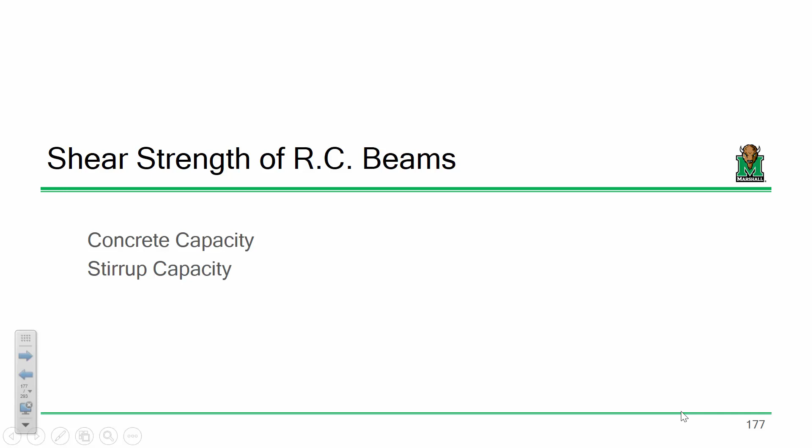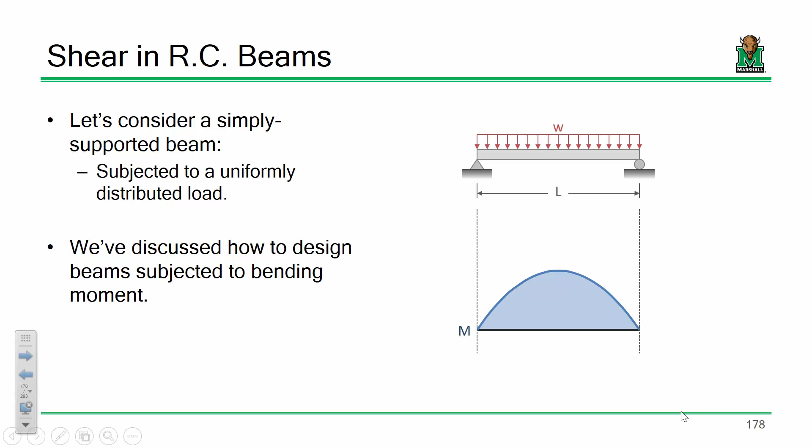And that's in shear. Now, we went over behavior last time. We talked about here's what a bending moment diagram looks like for the types of beams we've been designing so far. But here's the shear diagram.

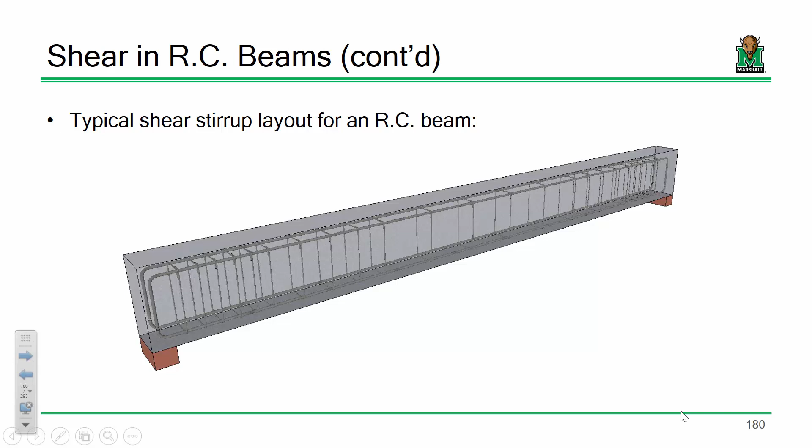So what we need to do is design and detail reinforcement according to shear. Now, what we're ultimately going to get is a reinforcement pattern that looks something like this. We're basically placing those hoop stirrups along the span, and we're going to have more of them bunched up near the supports, less of them near the midspan, but this is basically how we're going about things.

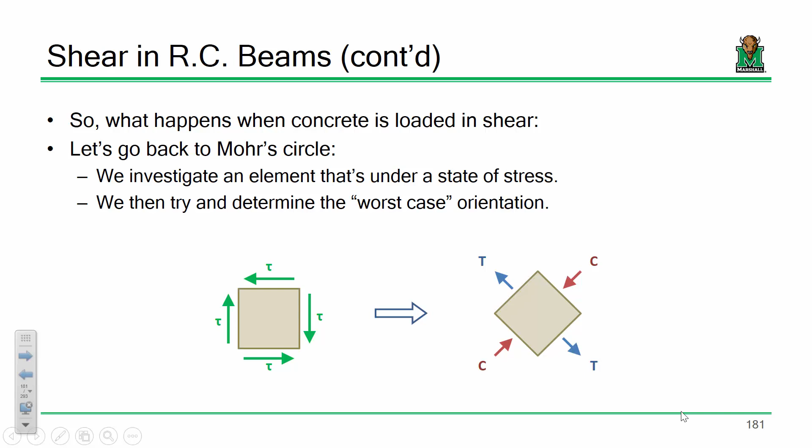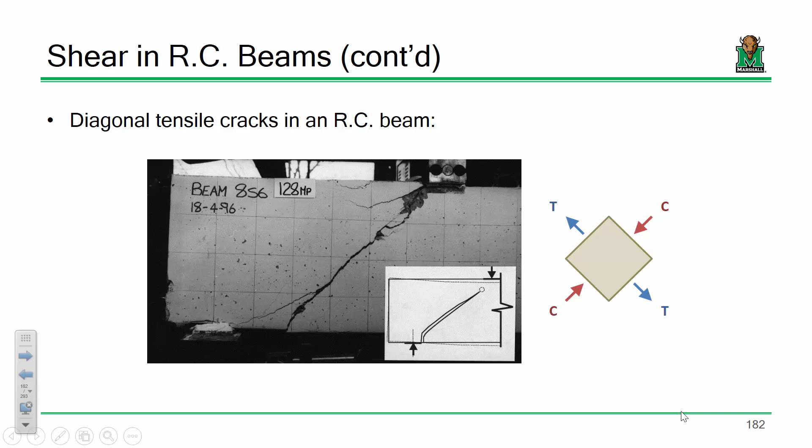We talked about Mohr's circle and how when you have a state of pure shear, Mohr's circle states that your worst case orientation is at a 45-degree angle, and that's why when you have a beam subjected to shear, it cracks at a 45-degree angle, because it's opening in the direction where it's experiencing a direct tensile stress. Remember, concrete is a material that behaves very poorly in tension, so that's the way it's going to open, along the direction of tension.

Now, as for capacity, the capacity is, first off, phi. Phi is constant. Phi is 0.75. There's never, in shear, and really from here on out, an instance where we have to determine phi. It's usually just given to us. So for shear, it's given. For deflections and development length later on, we don't even look at phi. And for columns, that's going to be a lookup. So it's pretty straightforward. Phi is 0.75. And then how do we determine how strong a beam is?

Well, it's the shear capacity provided by the concrete plus the shear capacity provided by the steel. So it's basically a sum of forces in the y direction. We have a shear load applied, and we have these two shear forces resisting.

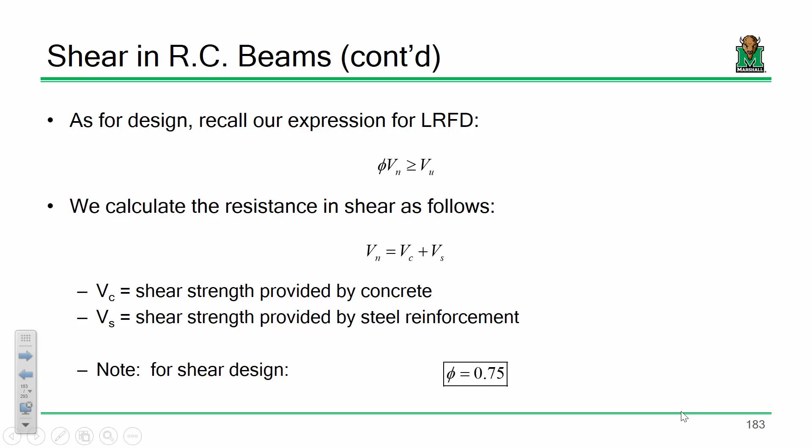For the strength provided by the steel, it's the area times Fy times this term D over S. And D over S is basically telling us how many stirrups we have that cross a given crack.

Lambda is the same parameter as it was before. Remember, it's 1 for normal weight concrete, 0.85 for sand lightweight concrete, and 0.75 for lightweight. So it's not really anything you calculate, it's something you'll have to determine. The only thing that would make this complicated is, I don't know, there's really no complication. Just make sure you remember what those values are from the F sub R calc, it's the same. And unless otherwise noted, we're going to go with normal weight concrete, so lambda is going to be 1 anyways.

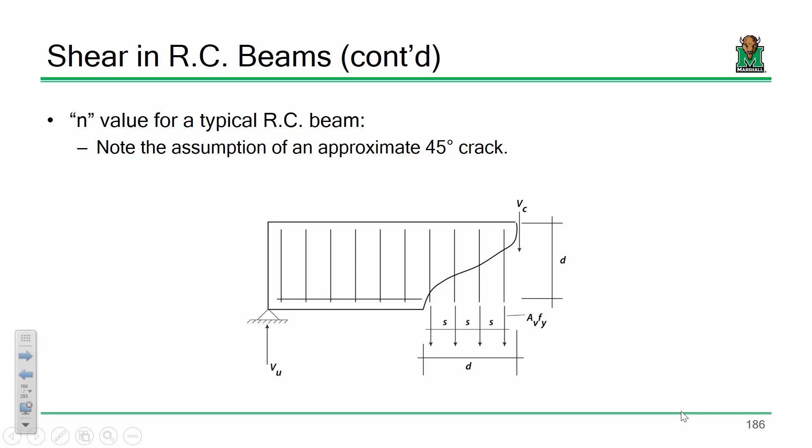As for AV, be very careful what area you're using. It's very common to use number 3 stirrups, which tend to be a lot smaller than your main reinforcing steel. In beam design we use things like number 8s, 9s, or 10s for the tensile steel, but for stirrups it's common to use number 3s or 4s. So if I say they're number 3 stirrups, that doesn't mean the area is 0.11 — it depends on the stirrup configuration.

If we had a stirrup configuration that looked like this, with a cracked region, to fail that steel I don't just rip through one bar — I have to rip through two, because that crack is going to go through two stirrups. So the AV value we'd use would be 2 times the area of the bar.

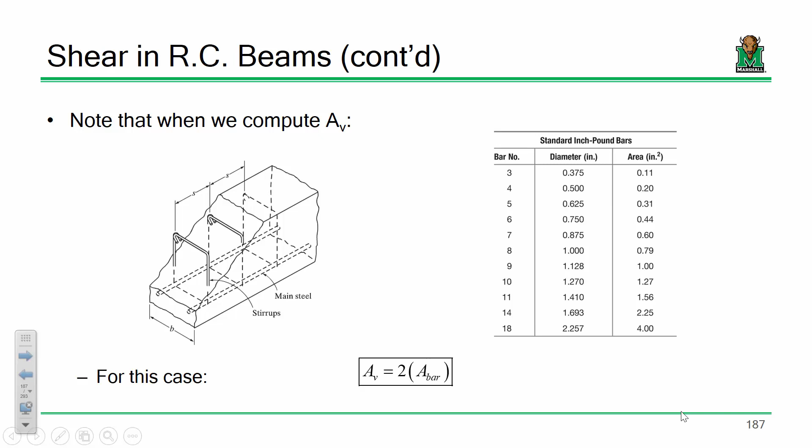The easiest way to determine this is like a samurai sword or lightsaber right through the middle of it, asking how many bars you're cutting through. One thing I'll mention in a lot of problems is a U-shaped stirrup — shaped like a U. A U-shaped stirrup would be indicative of 2 bar areas.

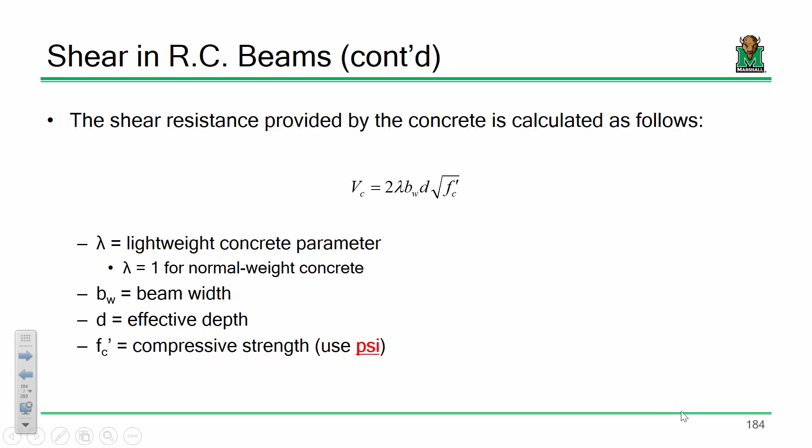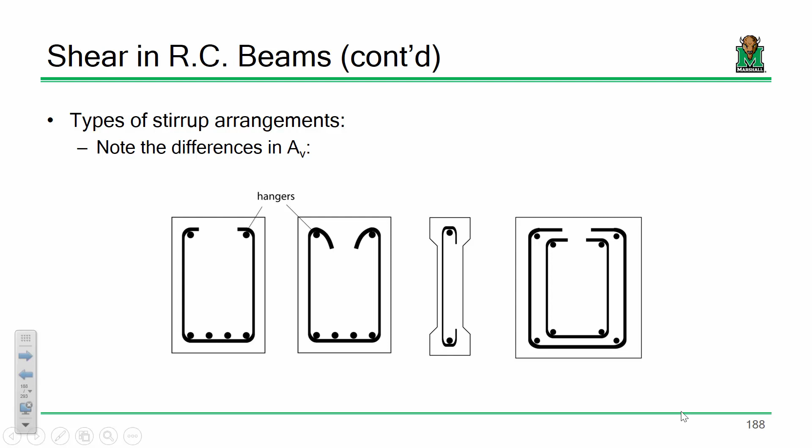Let me slowly walk you through this. Ultimately what we're after in shear is a shear design. I have one problem on the shear homework asking you to analyze shear capacity, but honestly it's a pretty simple problem — compute VC, compute VS, add them together, multiply by 0.75. I don't think there's much academic value beyond doing that once, just to see where the equations come from. What I'm really after is design.

The reason I'm so focused on design is because very rarely in the world of reinforced concrete design are we analyzing for shear. We usually think of shear from the designer's standpoint, almost as an afterthought. We have a beam, we tinker with how wide and deep it needs to be, and what area of steel it needs, to meet moment demand. Once we have that beam, we reinforce it according to shear. So shear design happens at the end, once flexural design is already completed. We rarely need to analyze for shear, except in a rating environment — which is why that first problem is pretty simple.

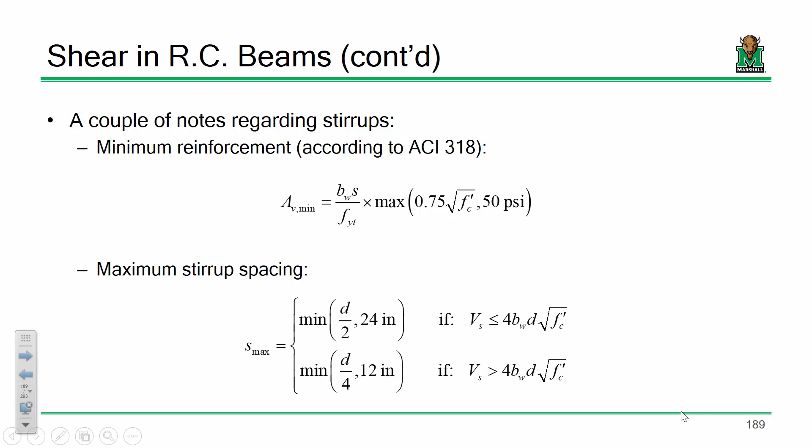The code lists requirements for shear, like minimum area of steel and maximum stirrup spacing. Since our goal is design, I'm going to rearrange a lot of these limits — instead of determining the minimum AV, I'll determine a feasible maximum stirrup spacing, because that guides design. So all these limits will be rearranged to solve for S. You don't really have to do that for the ones below, but I would for the one up top.

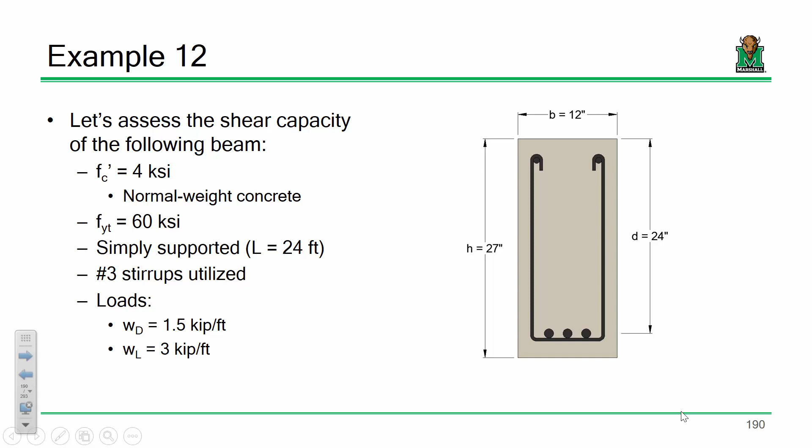That's good, yeah, I'm glad you're here. Let me go ahead and mention that now.

So if your loading and your geometry is symmetric, which is very, very common in structural design, what we do when we're speccing out stirrups is we will only spec out from the support to midspan, and then we just say that's going to be repeated along the other end. Does that make sense? Okay, all right.

So this is going to be rather quick. Okay, so the first thing I'm going to do is compute the concrete capacity.

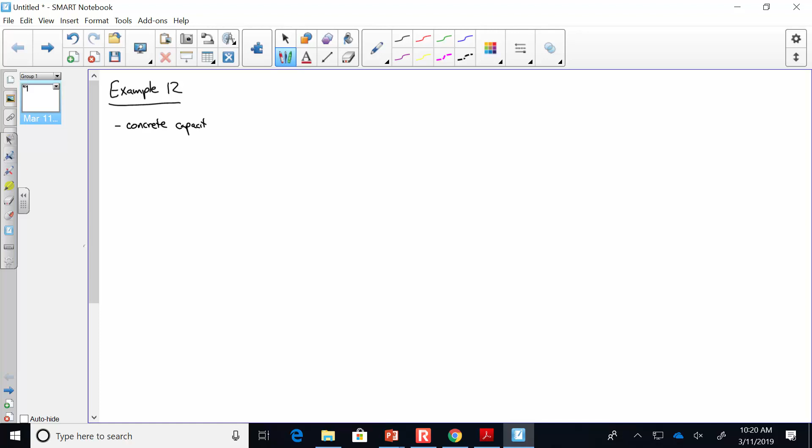Now in order to do that, let me take a look at the actual beam. This is going to be big. Forgive me, oh I knew that was going to happen.

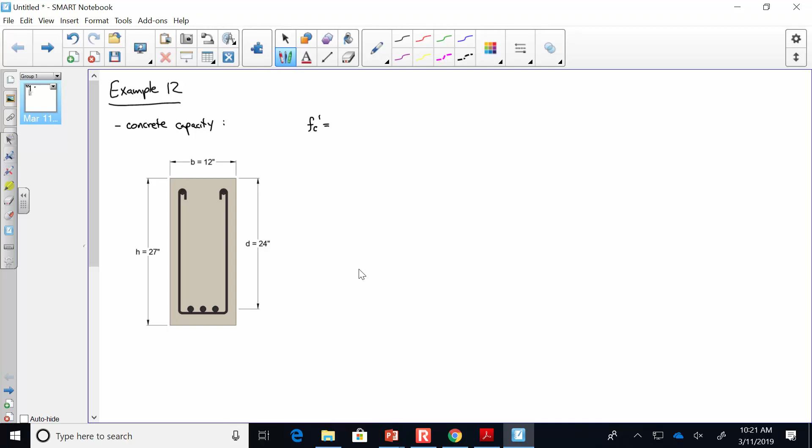Okay, now we have an FC prime that's 4 KSI, and we have a lambda that's 1, because for this beam we're looking at normal weight concrete. Now we have a B that's 12 inches, and we have a D that's 24 inches.

So when you're computing V sub C, it's 2 lambda BW D square root of FC prime. So that's 2 times 1 times 12 times 24 times the square root of 4 KSI, right?

There we go. No, Dr. Mike, you're wrong, you're an idiot. There we go, square root of 4,000 PSI.

And so when you plug and chug this, what do you get? First off, the units, what's the answer going to be in? No, it's in pounds. You're taking PSI and multiplying it by inches and inches. So when I say answer, I should have said VC, what's VC going to be in? VC is pounds.

36,427. Right, so that is 36.43 kips.

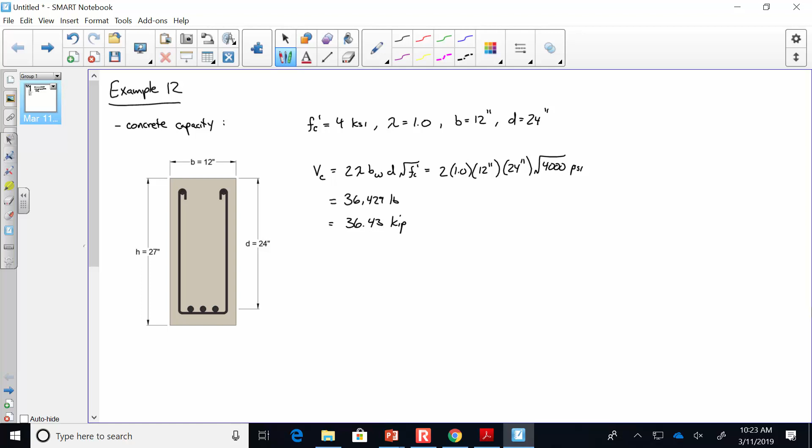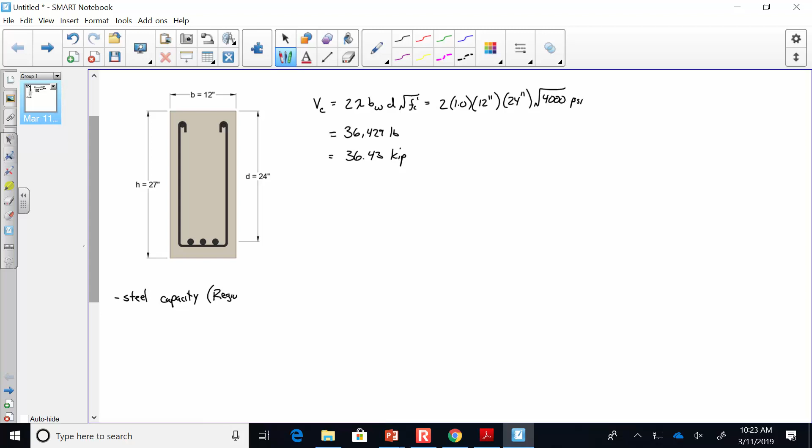Now here's what I'm going to do for the steel capacity. I'm lazy, so I'm only going to do this once. I'm going to do this for region 1. All right, and what do I mean by that? Here's the beam.

Here's the beam, right? Now, in region 1, what is the stirrup spacing? 4 inches. Okay, we have a D value of 24 inches.

We have an FY, which we call FYT, just so you're aware of the notation. That's FY of your transverse reinforcement. So longitudinal along the beam, transverse going up and down, although it's still 60 KSI.

And now we have to look at AV. First off, how many bars are we going to consider?

If there's a question, let me know. We're talking about just a single bar. Remember the way that the math works. Here's the equation that we're going to use.

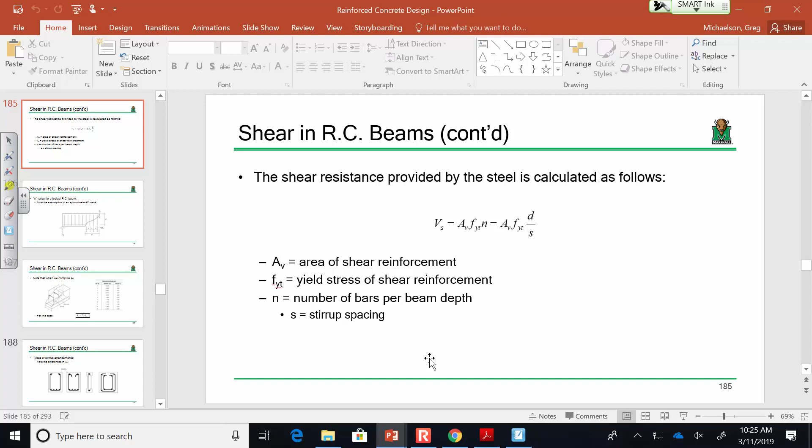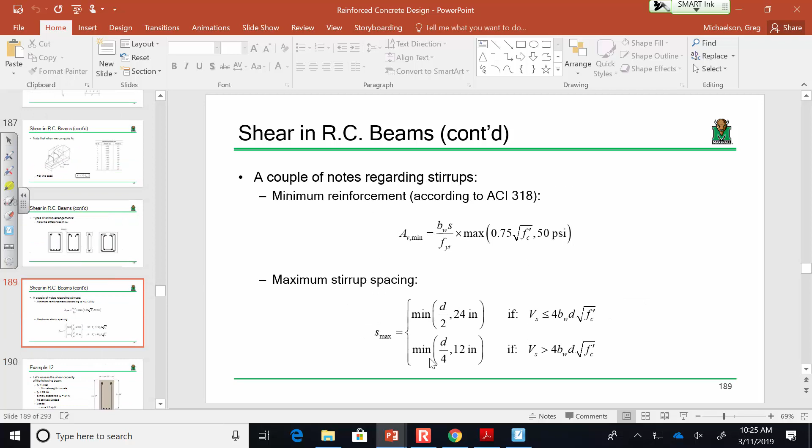We're taking the area of a single stirrup times Fy times the number of stirrups across a given crack. So we're going to account for the number of stirrups. What I'm asking is, if I have a single bar, how many sections do I have to fail through across a given crack? And for here, it's 1, 2. Everybody with me? Let me know if you're not, because we had like 2, 2, 1, 4, and then 26. So let me know.

Everybody okay with this? So again, we're just looking at a single bar now. We're going to take into account the number of bars here soon. Everybody with me? Okay, all right.

Do you agree then that the area in shear is going to be 2 times the area of the bar, right? Now, what's the bar?

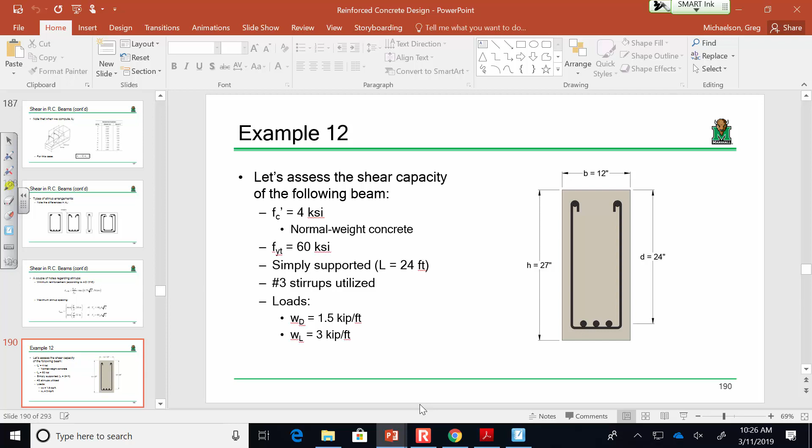What is the size of the stirrup on this problem? Anybody remember? Number 3. Does everybody see that? They're number 3 stirrups. What is the area of a number 3 bar?

That is 2 times 0.11 square inches. Now, before we move on, there are a couple of places that you could find that out. Let's say you don't remember what the area of a number 3 bar is. Well, first off, it's on slide 187. These are the standard bars, and these are their areas. So all the areas are listed there if you don't remember.

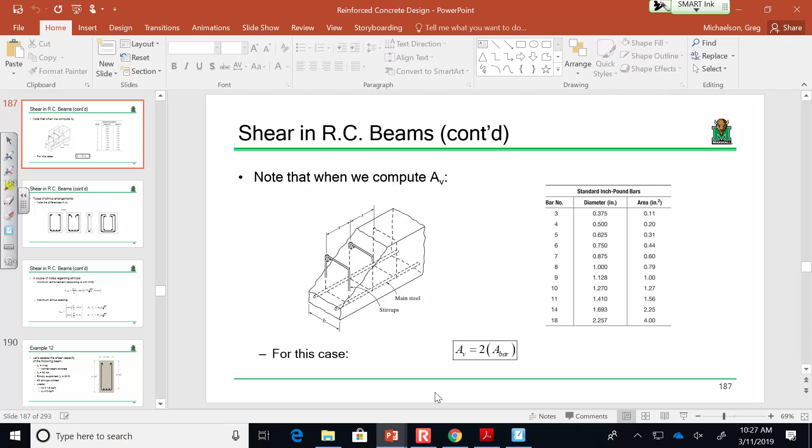But let's say you don't have that. Well, let's go back to this. Remember this? Look at the first row. The first row is the area of a single bar. So all that right here. So ultimately, what we're going to be doing...

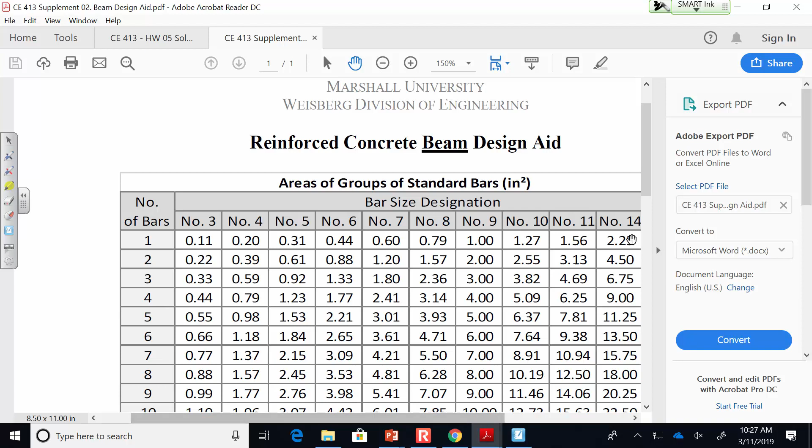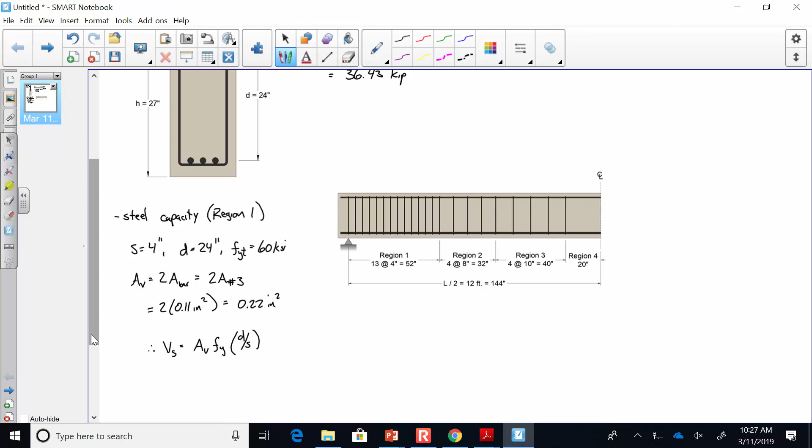...is taking 2 times 0.11 square inches. That's the area of a single bar, or 0.22 square inches. Is everybody okay with that? Now, what we're going to do to compute VS is we're going to take AV times FY times D over S. Now let's pay attention to that calculation very closely. So this is 0.22 square inches.

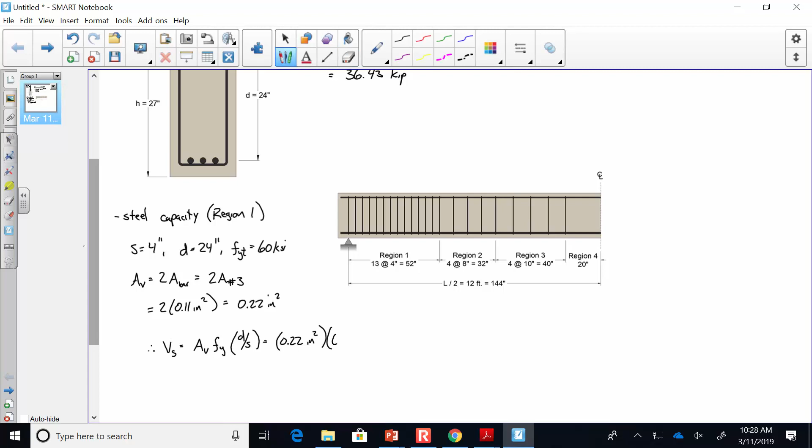KSI. And then this is 24 inches divided by 4 inches. So let's pay attention to this fraction. What is 24 over 4? 6. Okay, so here's the beam, okay.

And so if we're talking about region 1 and we're talking about it cracking under shear, what we're saying is that it's going to crack something like this. And what we're saying is that across a given crack, we have 1, 2, 3, 4, 5, 6 bars that we're going to fail through. Does everybody see that? And that's how we're accounting for that.

That's how we're accounting for that spacing. So it's not 26 bars because the crack occurs like this. It's how many bars cross a crack. So we take the area of a single shear stirrup and we say, well, how many stirrups across a crack? So that's why we do 0.22 times 60 times 6. Okay, does that make sense?

Everybody okay with that? Now, what does this come out to be? 79.2 kips. All right. So now can we combine that with our previous calculation?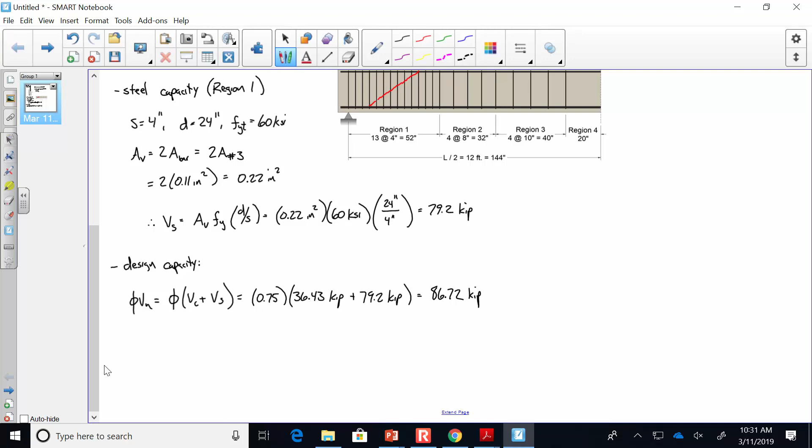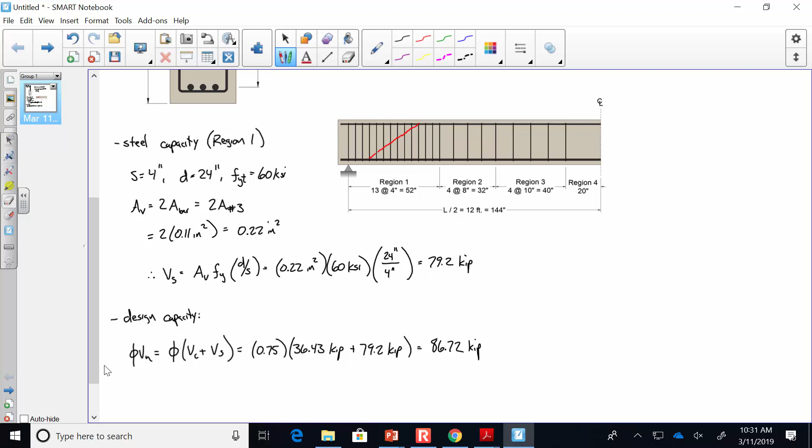Now, I would argue that this value is only going to be valid in the region where S equals 4 inches. Where does S equal 4 inches? Let's think of this like it was a graph. So this right here is X equals 0, and this right here is X equals 144, we'll do it in inches.

So this 86.72, where is it valid? It's valid from X equals 0 to X equals what? 52. And then this is going to, so what we would have to do is do all of that again.

However, what would change from doing it from this region to this region? The S would go from 4 inches to 8 inches, right? So we'd change that to 8. We'd compute another VS, compute another phi VN. Everybody with me on that?

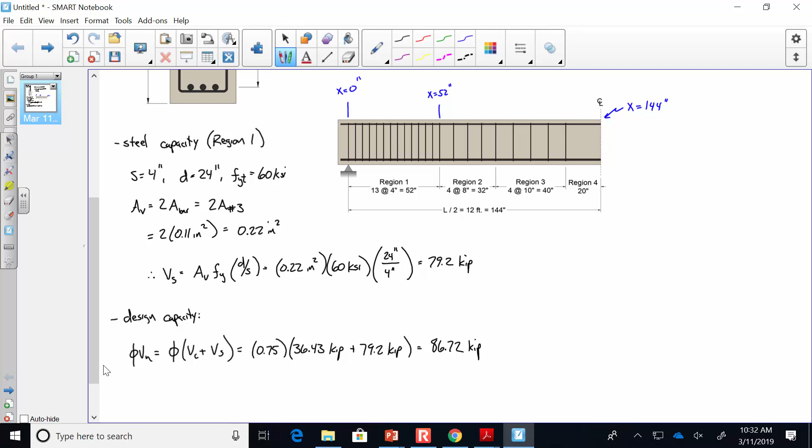Then, what's that? Well, it was, but we converted it, remember? Like when you initially calculate it, you get 36,429 pounds, but we round to 36.43.

Everybody okay with that? So we would then have another plot. So you're saying that the only difference in region 2 is we would have a different S value, right? That S value would change, so that would change VS and VN.

And that would go from x equals 52 to x equals what? Say it again. There you go. And then we'd have region 3 that would go from x equals 84 to x equals what, 124?

Now what about this region 4? How would we determine the capacity? Well, I'd argue there's no stirrups in region 4 at all. So what is the capacity? The VC, exactly. So it's the shear.

Remember, how do you determine the capacity? It's the shear capacity provided by the concrete plus the shear capacity provided by the steel. And I would argue that in region 4 there is no steel. So, hold on, I'm going to get to that here in a sec.

So here's what I would propose. I would propose that in this region here, VN is 86.72. So can somebody do a quick count?

Tell me, what would it be right here? Like, how would you do that? And what is that? 27.32. Say it again. 27.32.

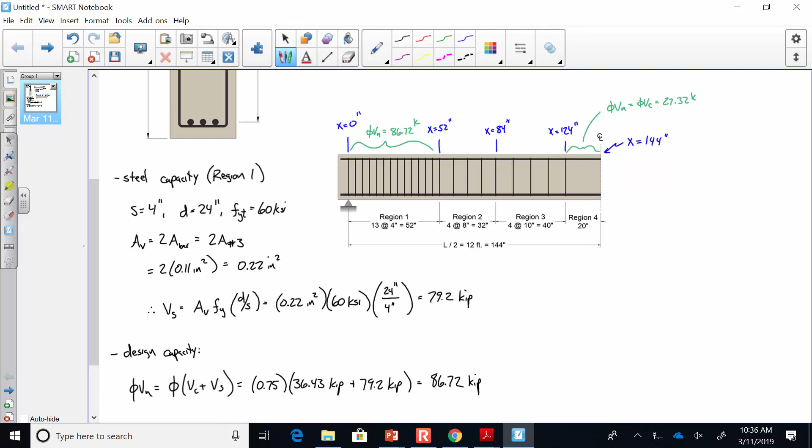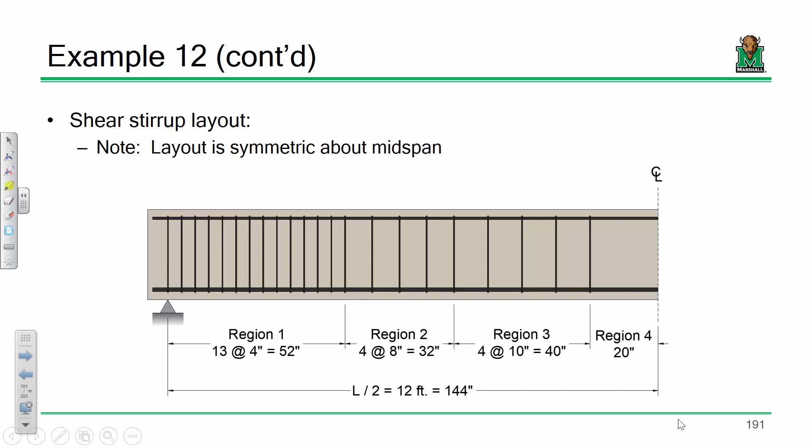Okay, so here's the example. Here's the stirrup layout. I want to look at that. Let's take a look at this plot. What I want to do right now is pay attention to the red line.

How many different stair steps do you see on this red line? I see 4 landings. 1, hold on... I see 1, 2, 3, 4.

What do you think this x value is right here? Maybe it's x equals 52 inches. Maybe this is x equals 0 inches. And I don't know, maybe this capacity looks like 86.72. Is everybody seeing where this is coming from?

And then as we get away from the support, the shear capacity is going down to a value of, what did you say this was? And that's from x equals 124 inches to right here, that's where x is 144. This, continuing on, that's just symmetry. Is everybody okay with that?

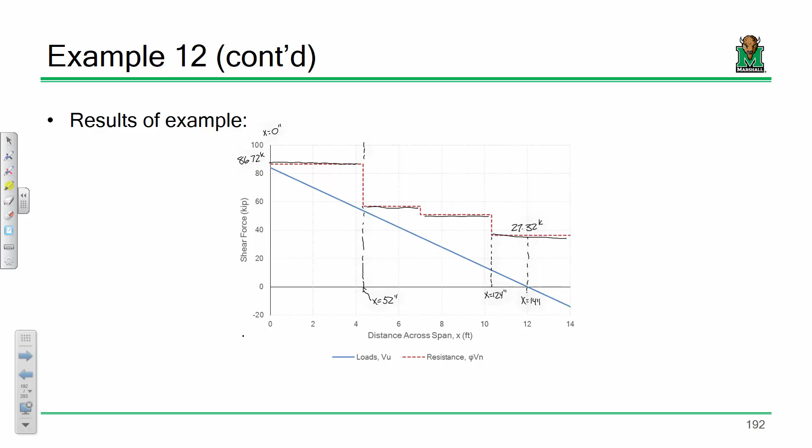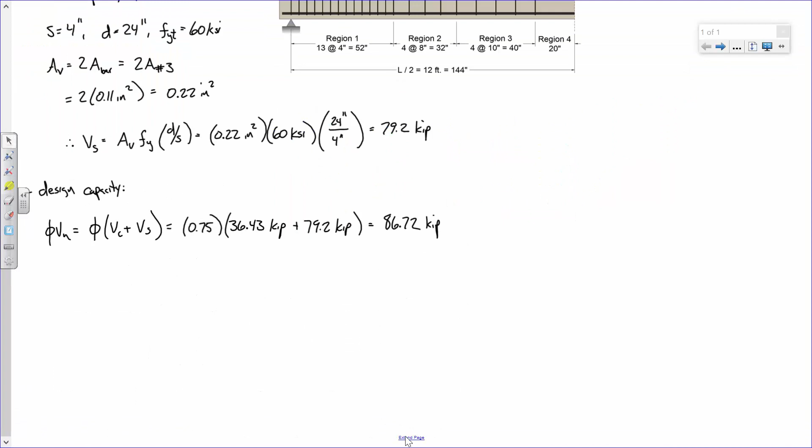No, don't spoil it, don't spoil it. I got questions to ask about that. Let's talk about that blue line. Oh, we were going to talk about it anyways. You don't have to blame him.

Now let's go back to the fundamental basis of LRFD. We have on one side the resistance, the strength of the section. What's the other side? There's the strength, how much it can hold up, but what's the other end of the equation? Thank you, how much we're putting on it, right? The loads. So let's do some structural analysis.

I'll come up with another question. Now, how long was this beam? No, no, let's keep everything consistent. I'm going to use feet, and you'll see why here in a second. So how long is the beam?

What is the dead load? Does that include the self-weight? Or does it say? We're going to assume it does. Bless you. What's the live load? So tell me what to do.

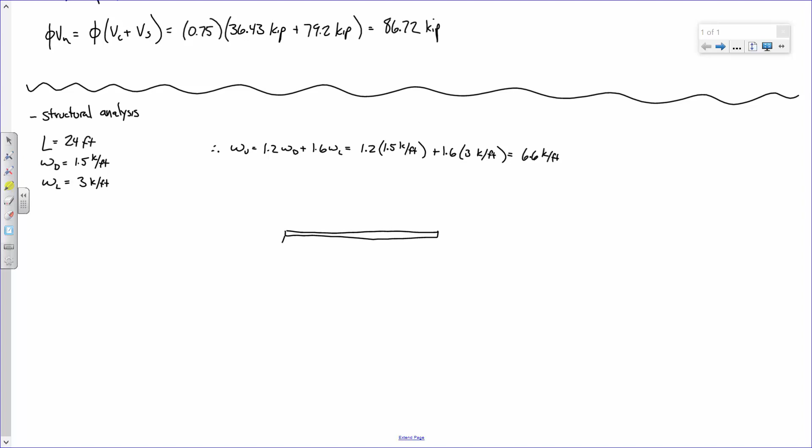So let's go back, I need your help in going back to CE 312 structural analysis land. What you're telling me is that I have a beam that has a load on it that's 6.6 kips per foot. We're going to get real here, okay, as opposed to getting virtual. So we have a 6.6 kip per foot load on a beam that's 24 feet long.

So I propose that there's an AY, and I propose that there's a BY. And then this is 24 feet long. Somebody tell me how to find those reactions.

We can, well hold on. So let's go back to what he said. I'm going to entertain what you said. So collapse that into a single point load, sum moments at A to determine the reaction at B, sum forces in Y to determine the reaction at A. What were you saying?

So that's collapse it into a single point load. We're not going to do that. We're not going to do that. You're on to something, but we're not doing that right now. Why did you say that? It's symmetrical on... exactly right, half and half, right?

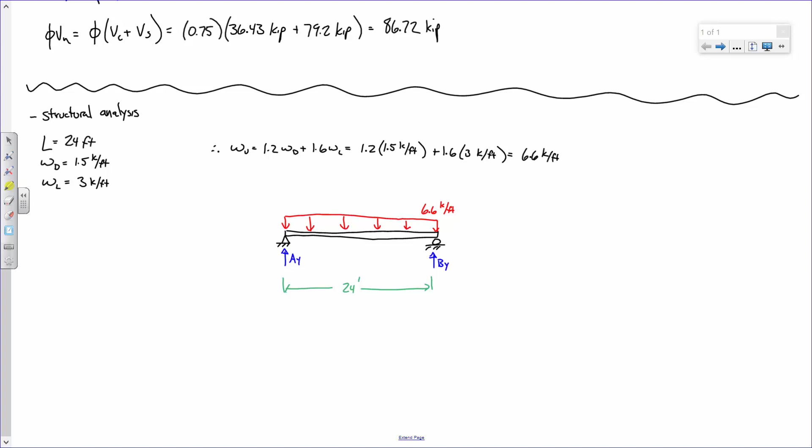So collapse, let's do that. Collapse that into a single point load, and what do you get? I have a second on that? So how would I get those reactions again? And what is that? Right?

Now, tell me what to do. I'm not saying anything, you're going to tell me what to do. I know you know how to do this. There we go, all right, all right.

So we start at 0. Start at 0, go up. 79.2. Then what? So we, all right, so we go down to negative 79.2, and we go, boo, right?

And the technical term for that, for the folks watching the video, is we drop down linearly, right? To negative 79.2. And this is 0. And the slope of that line is negative 6.6, right?

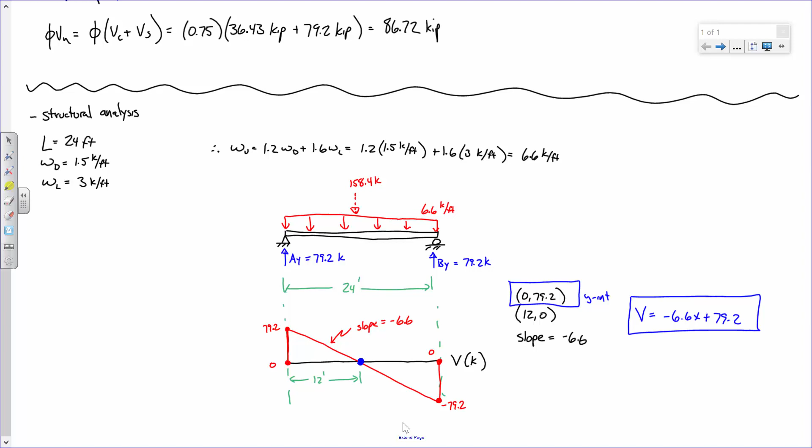Now, there we go. You asked what the blue line was. Here's the blue line. Although, I'm going to be honest—hold on, what was the reaction?

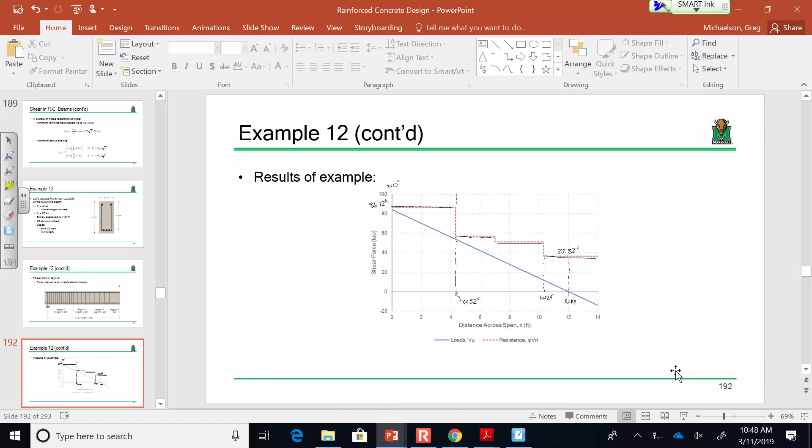79.2? I've got something off on this graph because it's not right. Something's off. You know what, let's just do this for real.

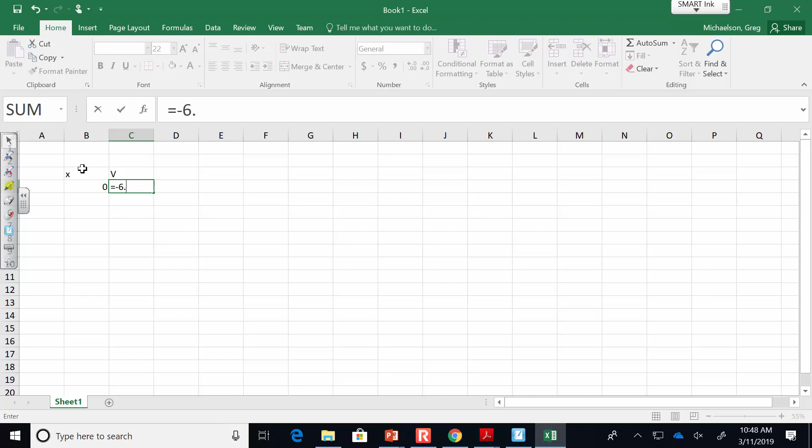What did we say the equation of the line was? All right.

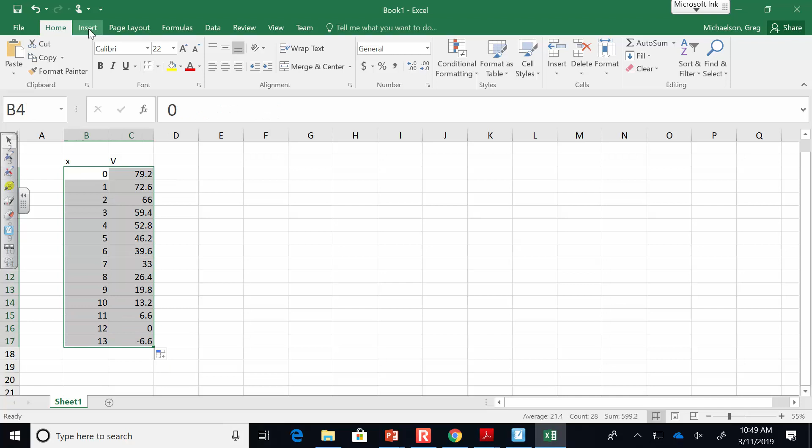Okay, so that's looking right because that's x equals 0, or x equals 12, and that equals 0. So let's plot this. Insert, plot. Okay, so far so good, right?

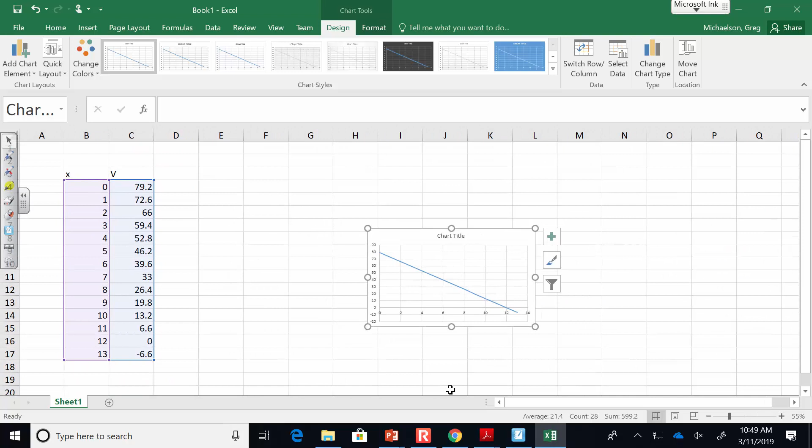Now, what were the stair-step values we had? What was that? 86.72 and so on and so forth. Everybody starting to see where this is coming from?

Okay, now here's the big point. We're running out of time, and I don't have time to redo everything. But let me ask you this: does everybody see how the stair-step is a little bit above the blue line? What do you think that means? We're good, why? Bam, exactly right—the capacity is larger than the applied load. So that's what we're after.

Now, what he said was, why don't we just use the worst-case design everywhere? That's a possibility, but ultimately that would mean you'd have a beam that's way over-designed. So what we're going to need to do, and we'll start this next time, is figure out how exactly we lay out a stirrup pattern according to shear. There's a process—we'll go through it step by step next time, and there's a nice little step-by-step procedure. But I'm going to save that for next time.

There's a couple ACI code provisions that we need to discuss. Yes? Is there a reason that when...

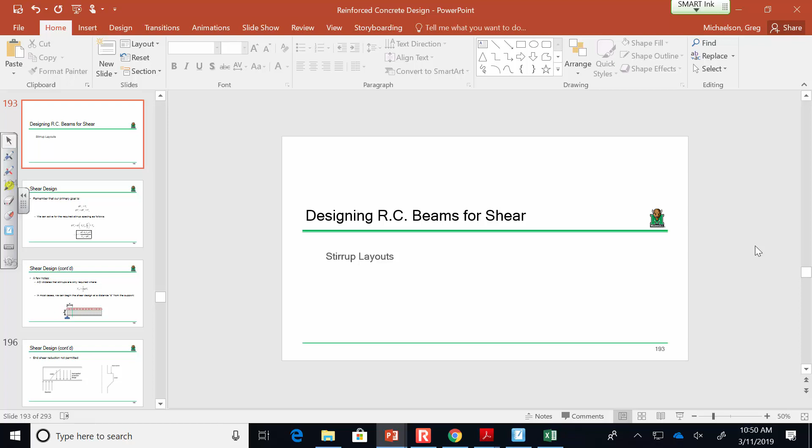The capacity gets to be a lot more than the load? Oh, that's a great question. This right here, you can see how this is accurate, but this right here really isn't. There's a couple reasons for that, and that'll become very clear next time. One: even if I provided no stirrups, there is still the capacity provided by the concrete, right? So there's a point where it's just going to go on forever.

And we don't really have much room to change the size of the beam because remember, the beam size was figured out because of the moment. Point two, and this will become clearer next time, there are limits to how far we can push the envelope with shear. There are certain regions where the code says, I don't care how much load is on the beam, you're still putting this many stirrups. The reason is that when beams fail in shear, they go quick. So the code has some safety provisions to back that off a bit.

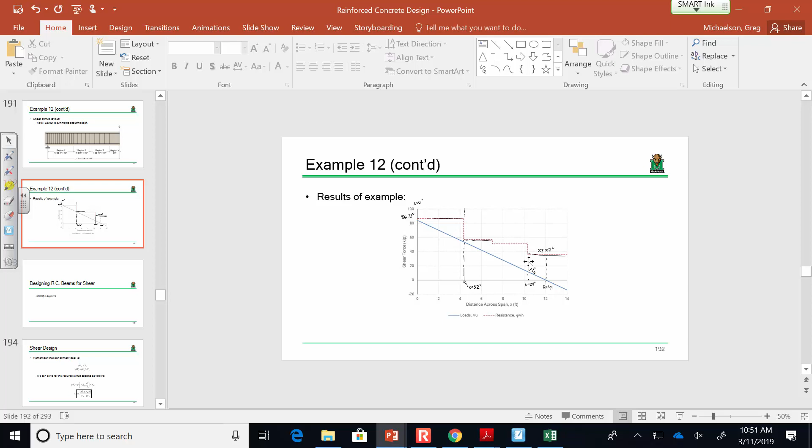But that'll become clear next time. I don't want to dig too heavily into the details. But I am going to look at that graph because there's some numbers that look a little weird. I'll check that next time. Everybody good? See you in a few minutes.